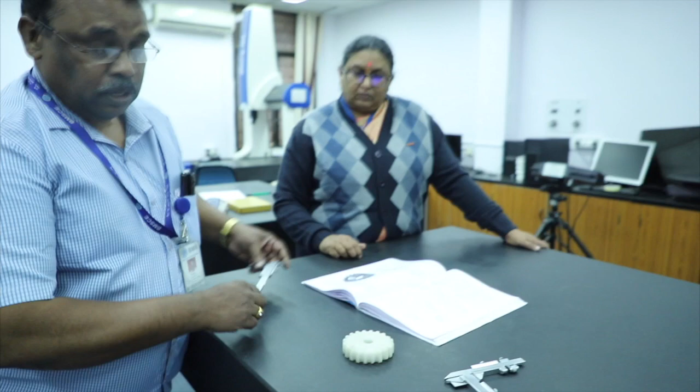Next experiment is measurement of gear tooth measurements using gear tooth vernier.

Now see, this is the gear. Different types of gears are there. Spur gear is one of the types. Gears are bevel gear, helical gear, spur gears. These are different types. Worm and worm gear are also there. This type of different types of gears are there.

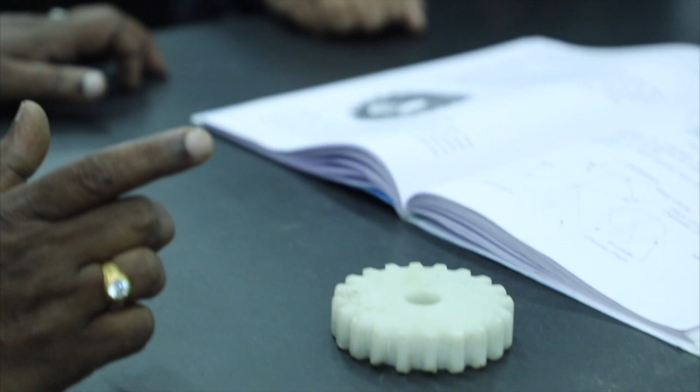Gears are normally used for the purpose of transmitting power in close contact. If the motor is here and the shaft is away from the motor, normally we are using chain drives. Sometimes we are using belt drives also. If it is in close contact, we are using normally gears, to align the two gears and rotate it.

So first you have to study about the nomenclature of the gear tooth. This is the nomenclature of the gear tooth. This portion is called addendum. The inner portion is called dedendum. In between the centers, addendum to dedendum, there is a line, the exact center line.

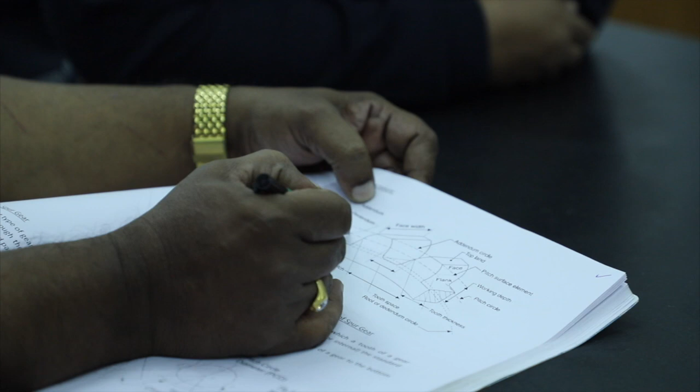That is PCD. PCD means pitch circle diameter. If you align two gears and rotate it, the load acts exactly on the pitch circle, PCD.

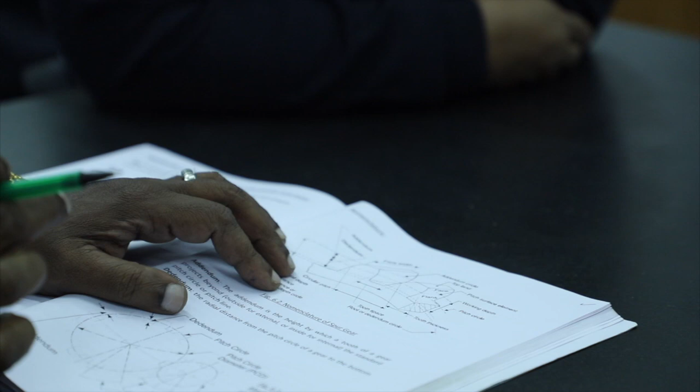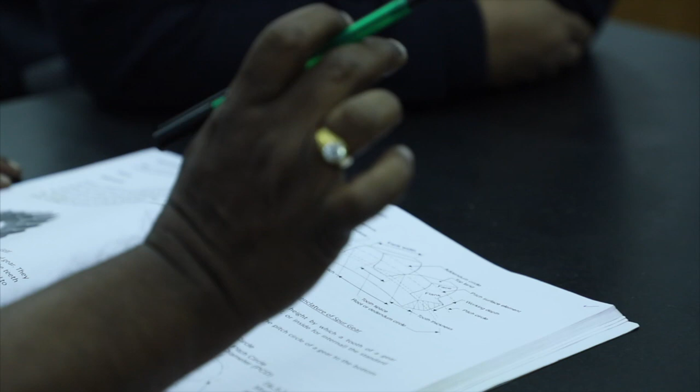If the thickness is less than the actual size, it creates so much vibration and noise because there is a gap. So to avoid the gap, you maintain exact length. Suppose if it is more than the actual size, it doesn't rotate freely, it's stucking, so avoid that also. Not exact, not more size, not less size — they are given some close tolerance. Within that level, you have to measure it.

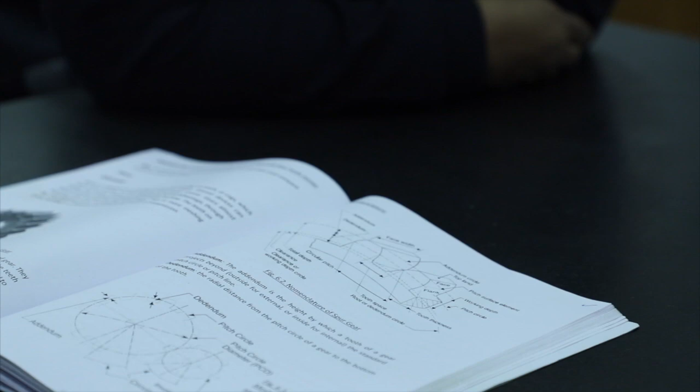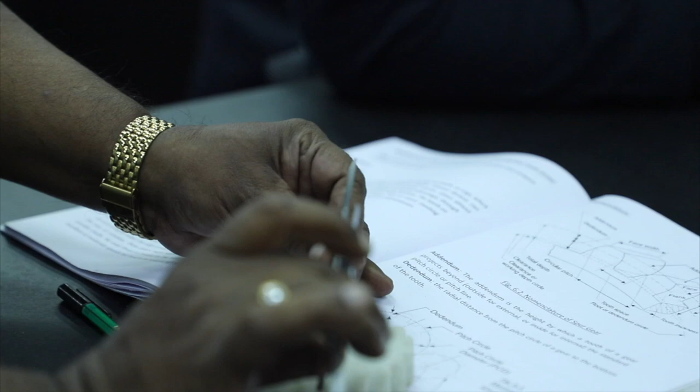Normally we measure the addendum — it is possible with a normal vernier caliper. We can also measure the dedendum this way. Addendum is possible, dedendum is also possible. But we can't measure exactly the PCD.

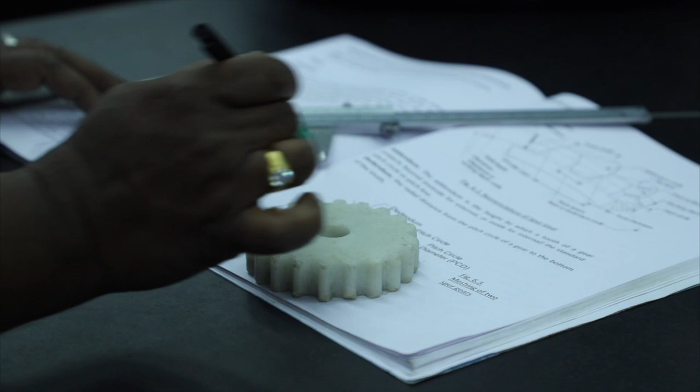PCD is an imaginary circle. There is no reference point on that circle. But the PCD is very important, no? So how to measure the thickness? They made one more extra attachment on the same vernier caliper.

See here, this is the normal vernier caliper. There is one more extra attachment — vertical slide. This is the horizontal slide, and one more is the vertical slide.

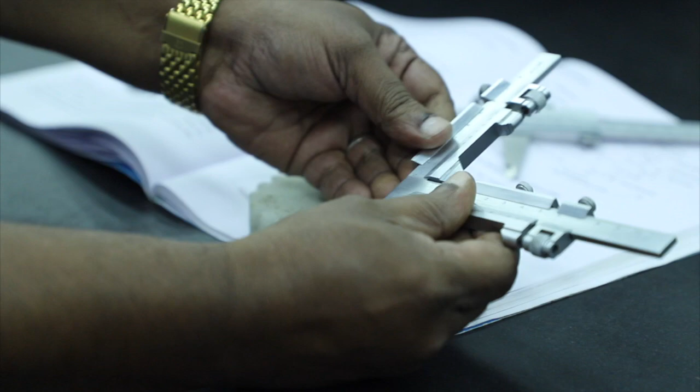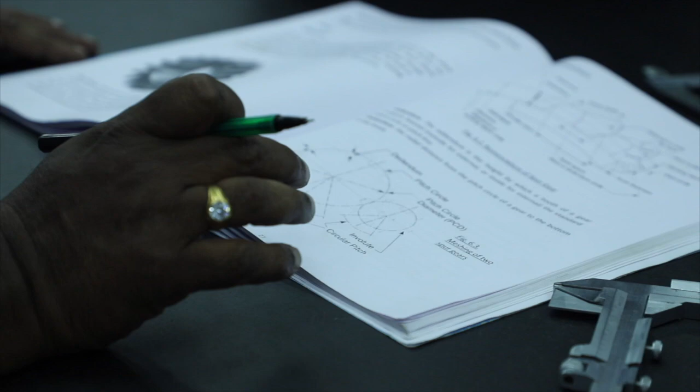So first you study all the parameters. After that, find out how much the thickness is, how much the depth is, how much the addendum is, how much the dedendum is. You have to calculate all those theoretical values.

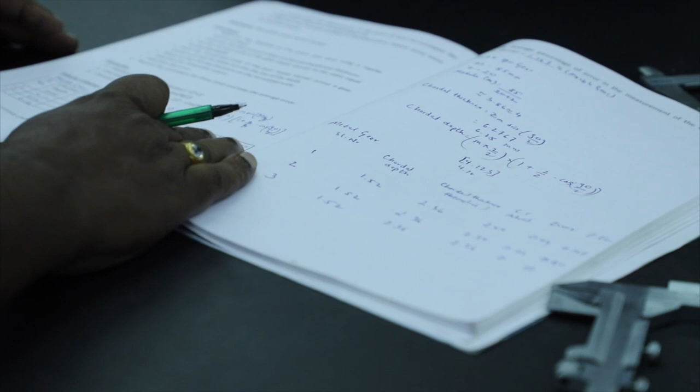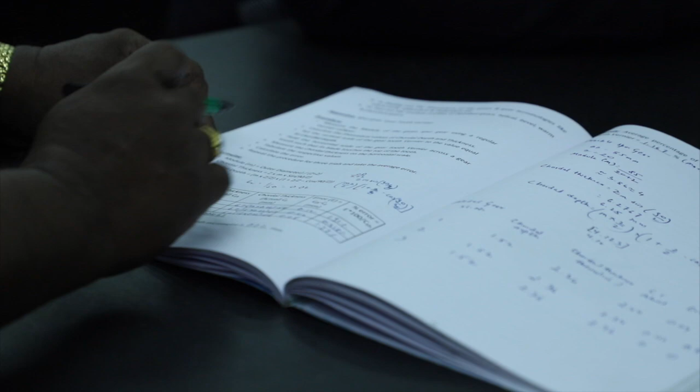There is one formula. First you have to find out the module. Module is the size of the gear tooth cutter. You have to find out the module using the equation: outer diameter divided by Z plus 2, that is OD divided by Z plus 2. You measure the outer diameter using the normal vernier caliper.

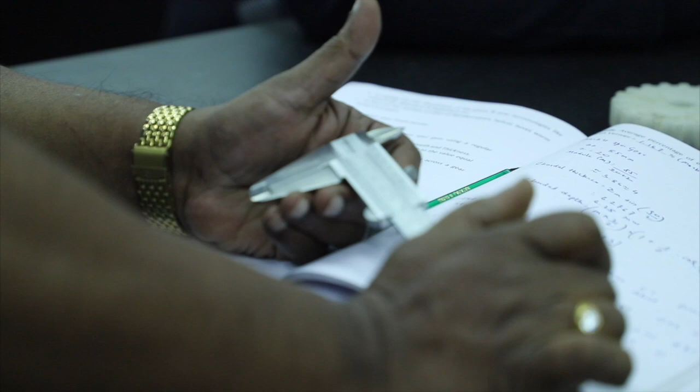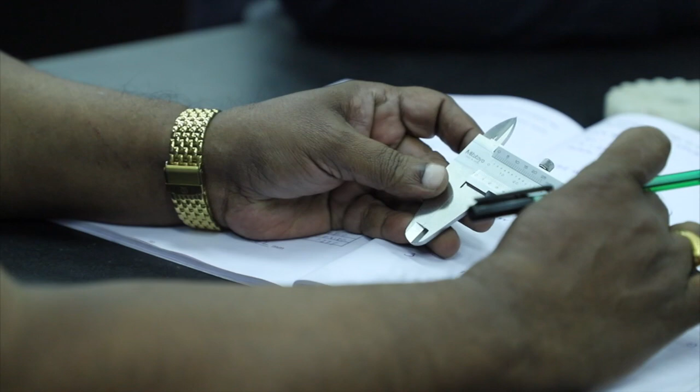Before using the measuring instruments, first you have to find out the least count. See here, this is MSR, main scale reading. This portion is VSR, vernier scale reading. Value of one main scale reading divided by total number of vernier scale divisions — that is called the formula of least count.

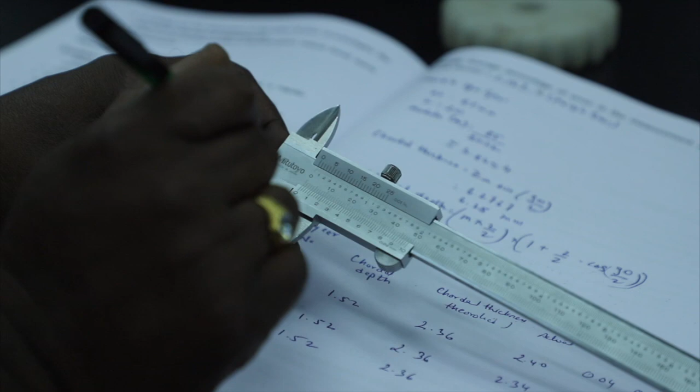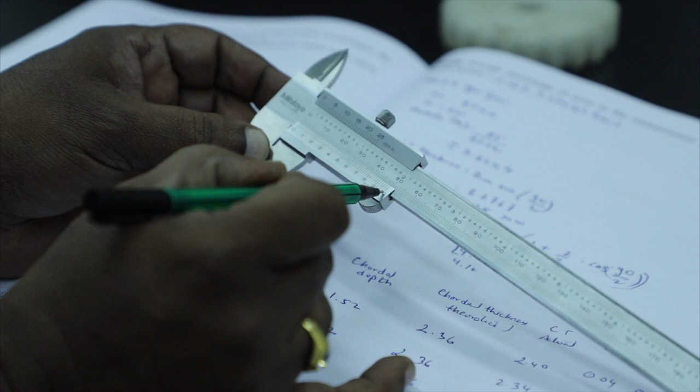This is 1 millimeter, the value of one main scale division. That 1 millimeter is cut into equal parts — not 10, but 50 equal parts. Here they mentioned 10, but extra 5 divisions are there: 5, 10, 15, 20, 25, 30, 35, 40, 45, 50. There are 50 equal divisions in that vernier scale.

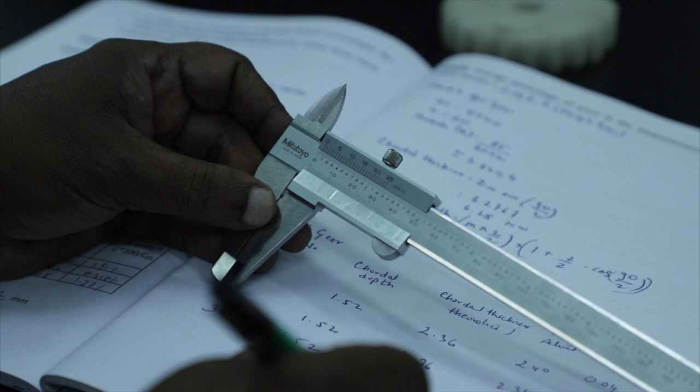Value of one main scale division is 1 millimeter divided by 50 vernier scale divisions. So the least count is 0.02 millimeters. Now see how to measure that.

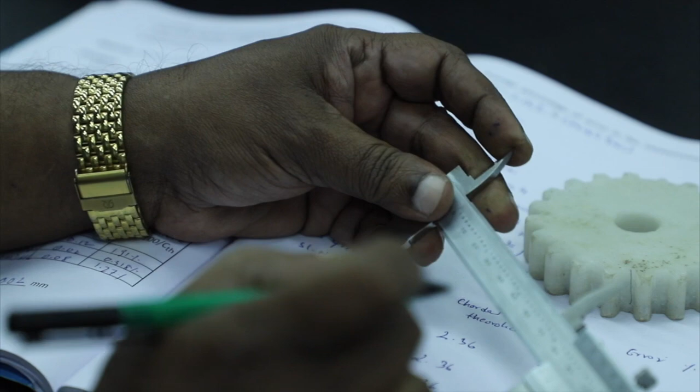Keep it locked in this way. Now you see the zero of the vernier crosses the 84th division of the main scale.

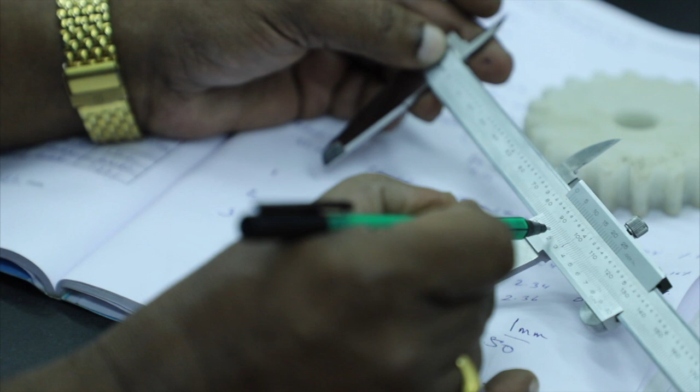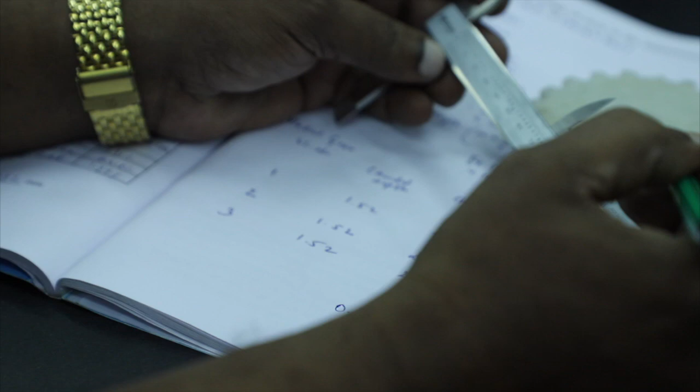So, 84 millimeters. Then you see the vernier scale division which line is exactly coincident to the main scale division. Now you see this division is coinciding, no? 5, 10, 15, 16th division is coinciding. 16 into 0.02, how much? 0.32.

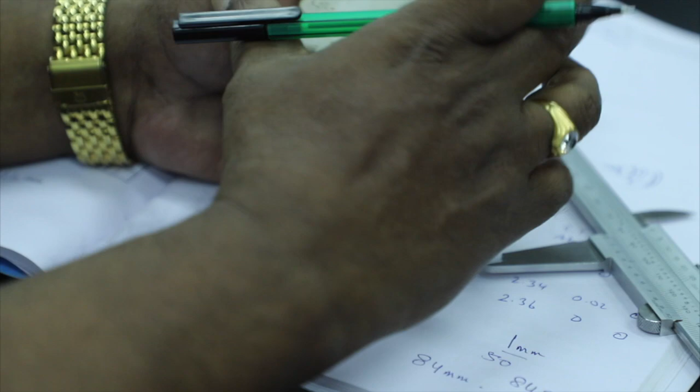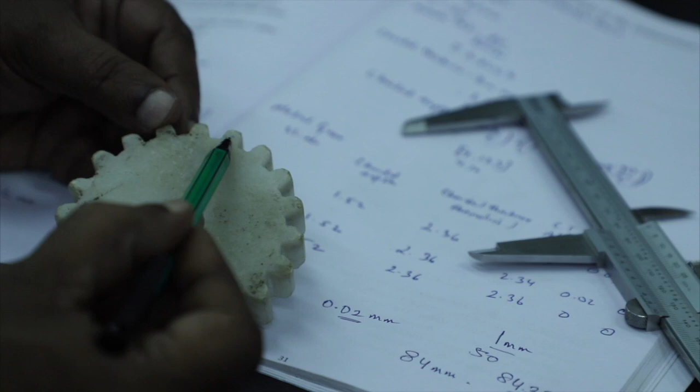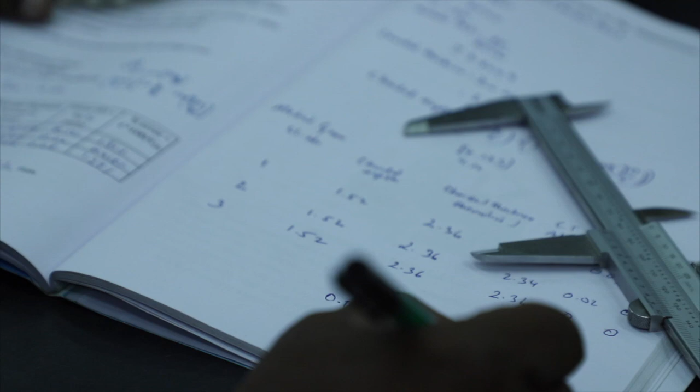So 84.32 is our answer. So the addendum outer diameter OD is 84.32 divided by Z plus 2. Z means number of teeth. Now you count how many teeth are there. 1, 2, 3, 4, 5, 6, 7, 8, 9, 10, 11, 12, 13, 14, 15, 16, 17, 18, 19, 20. Z plus 2 is there, no?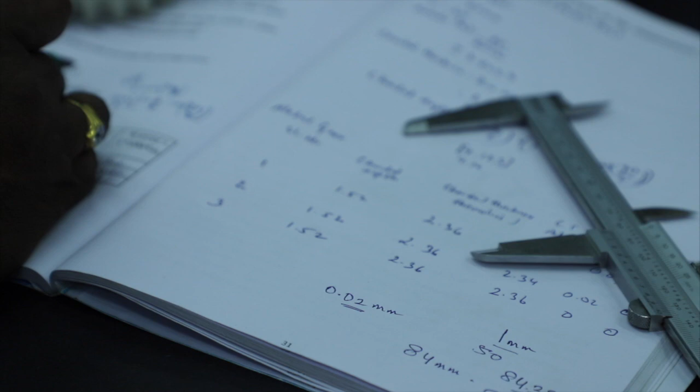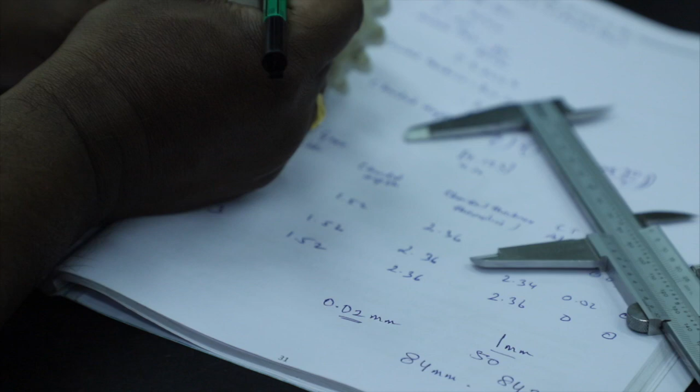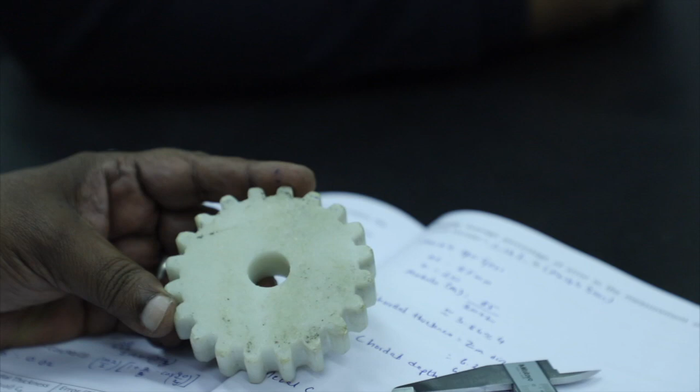That is the module. Now we have to calculate that value. Our answer is 3.86.

3.86 module is not available in the market. Modules are standardized. Module means the size of the gear tooth cutter. So the nearest one is 4. So 4 is our module.

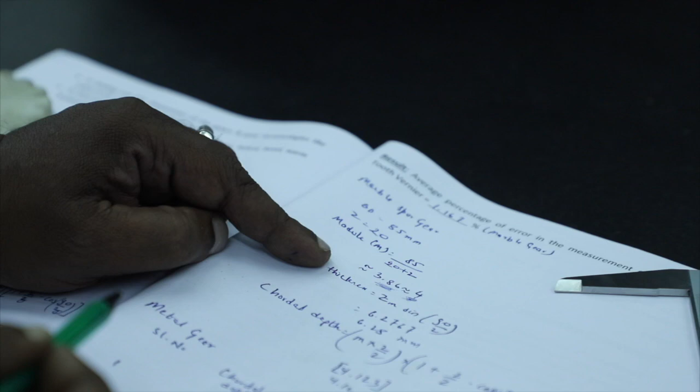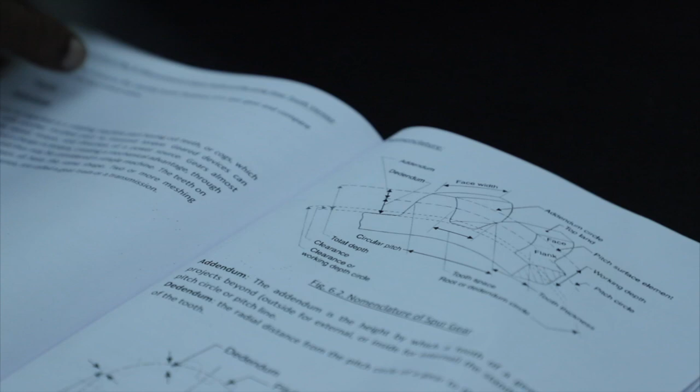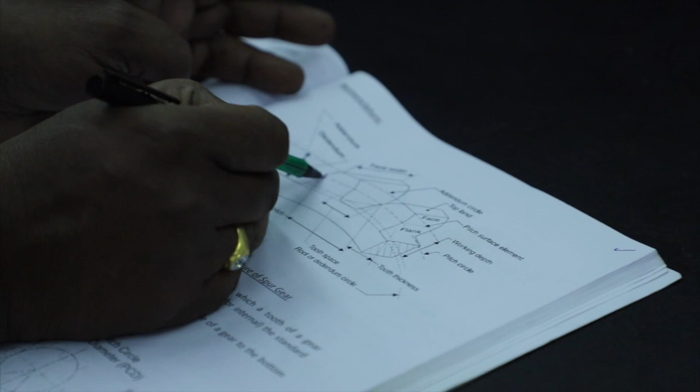Okay, next go for chordal thickness. Chordal thickness is the distance between, see, exactly in the pitch circle diameter, this end to this end. This is the chordal thickness.

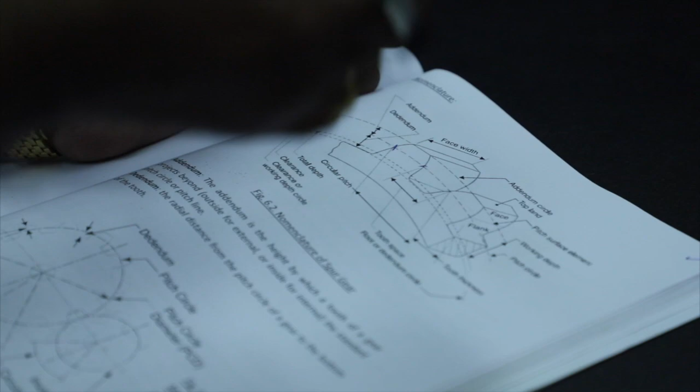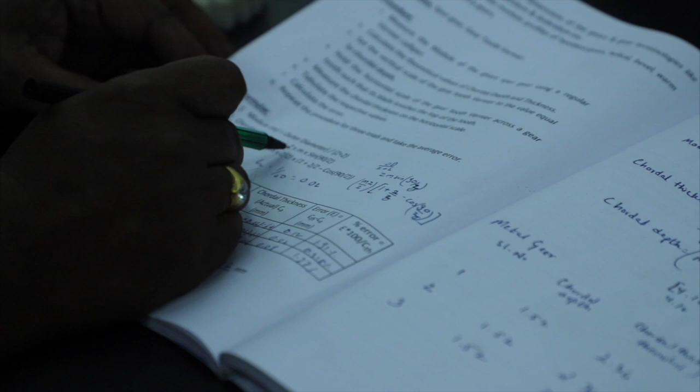Okay, next you have to find out the chordal depth. There is one formula to find out the chordal thickness: Zm into sine of 90 by Z. Z means number of teeth, into module, which we already found out. 4 into sine theta, within bracket 90 divided by number of teeth. Use this formula, you get the chordal thickness. Theoretical chordal depth we got is 4.12.

Okay, that 4.12 you have to adjust in this way. Again, chordal thickness theoretical formula: Zm into... okay, this is chordal thickness. Next, chordal depth: m into Z by 2, into within bracket 1 plus 2 by Z minus cos 90 by Z. Use this formula, you get the chordal depth.

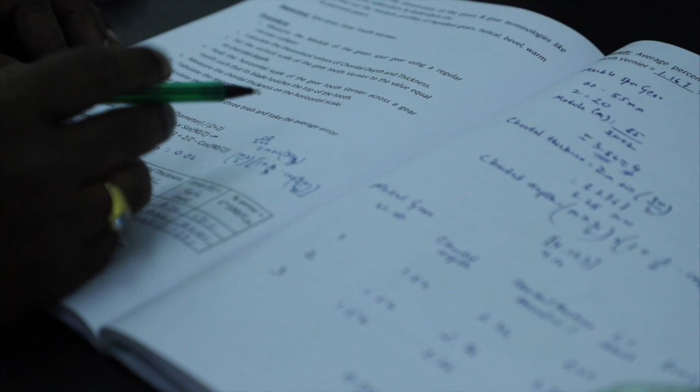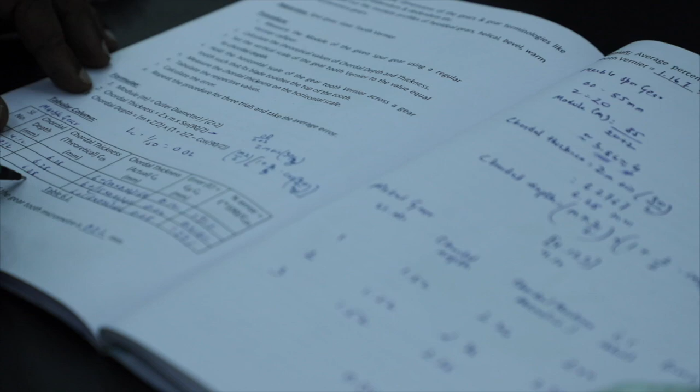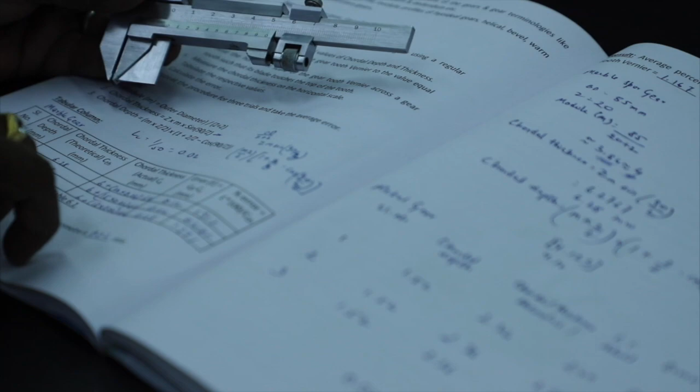Okay, now the calculated value you got is 4.12 for chordal depth, and chordal thickness is 6.28. Now you align all these things. Theoretical value for chordal depth is 4.12, no? Now you adjust this way. This is gear tooth vernier, this is normal vernier. The least count for both is the same.

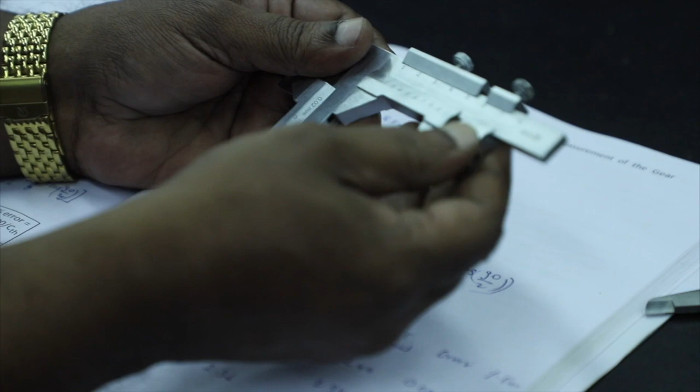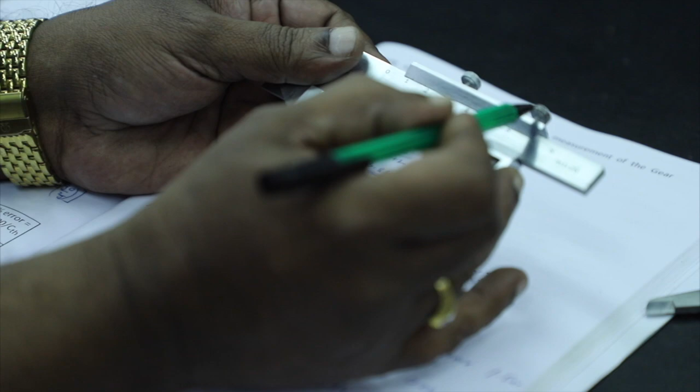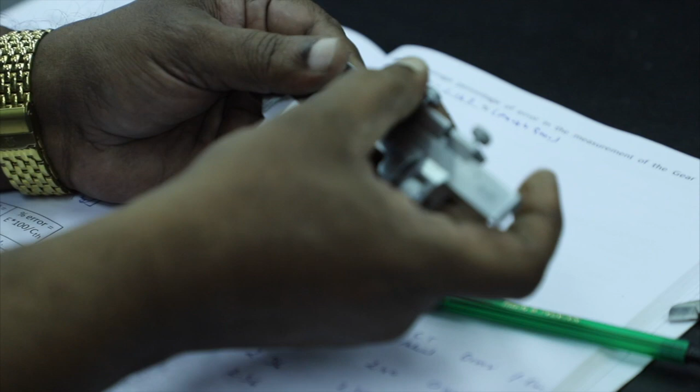Okay, now how to adjust that one? This is the fine adjustment screw. This is the screw lock. This is the final lock. Now first you lock this one. Rotate.

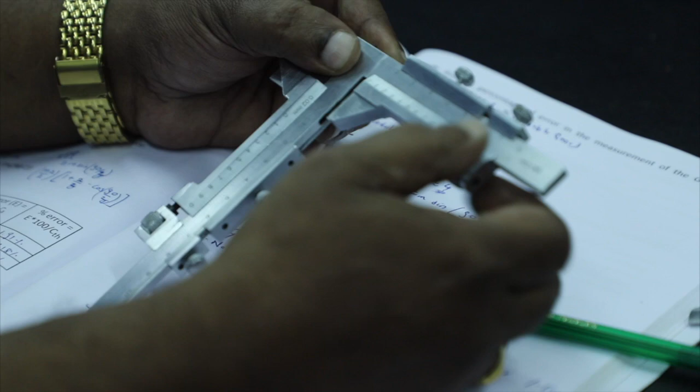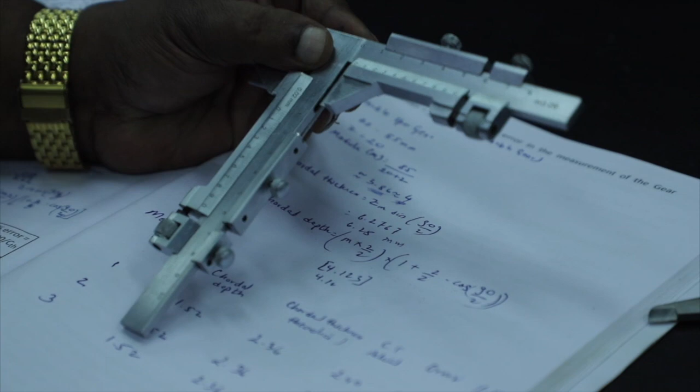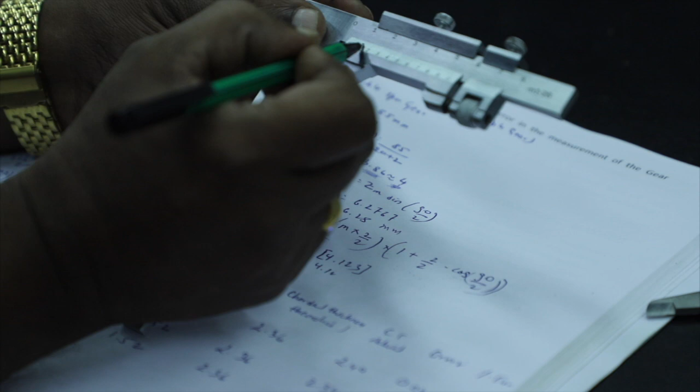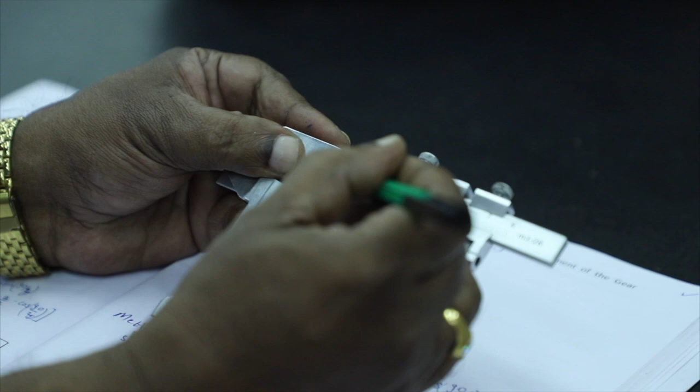Now see, the zero of the vernier crosses the 4th division of the main scale. 4 point, then our answer is 4.12, no? 12 means the 6th division of the vernier scale, each division referring to 0.02. The 6th division, you see which line is nearer to the 6th division of the vernier scale. Just observe. This one is nearer, no. You align exactly using the fine adjustment screw, this way. The 6th line is coincident.

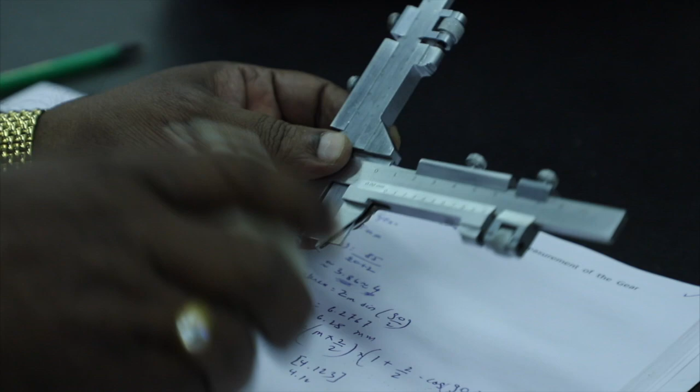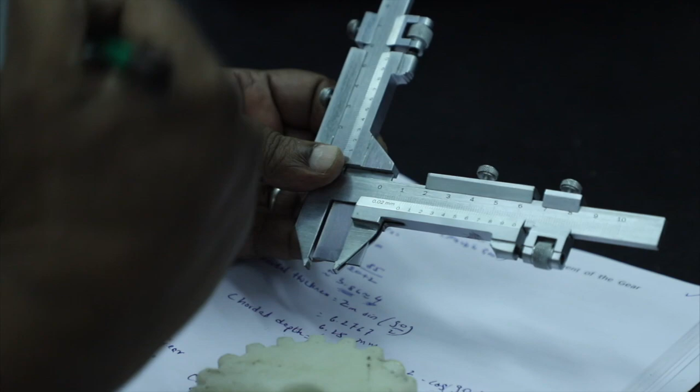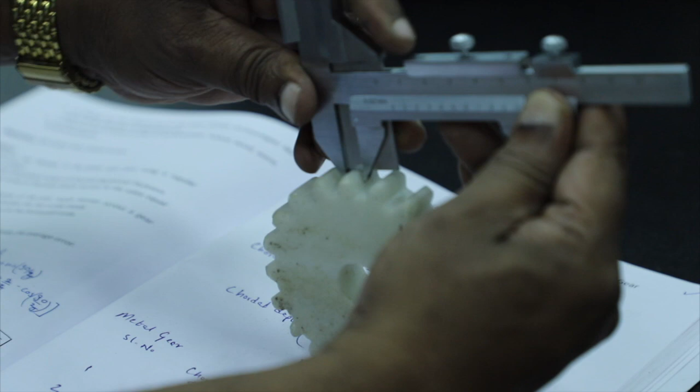Okay, then finally you lock both of them. Now see, this guideline blade is there, no? It is exactly bringing down the 4.12 distance. Now you place this blade in contact with the addendum portions. Automatically, you measure the thickness, no? Exactly at the pitch circle diameter.